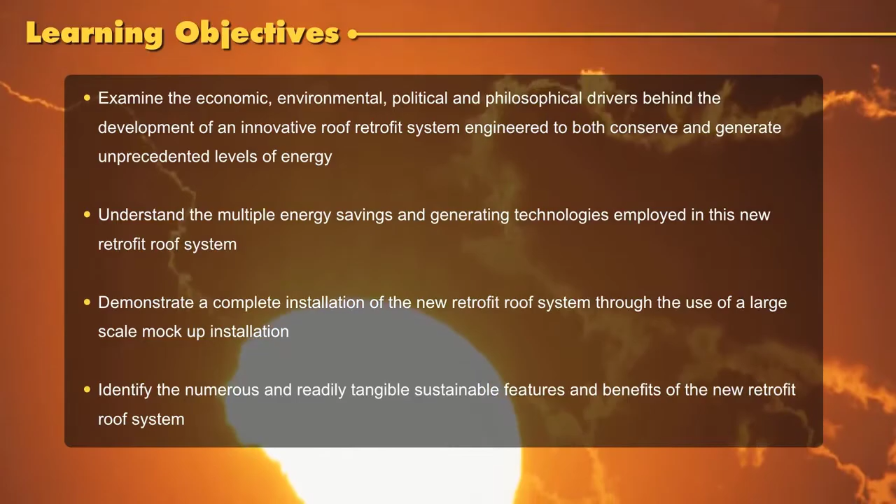In 2010, the Department of Defense, through their Environmental Security Technology Certification Program, ESTCP, awarded a grant to demonstrate a novel integrated energy-efficient metal roof retrofit system using commercially available products or systems.

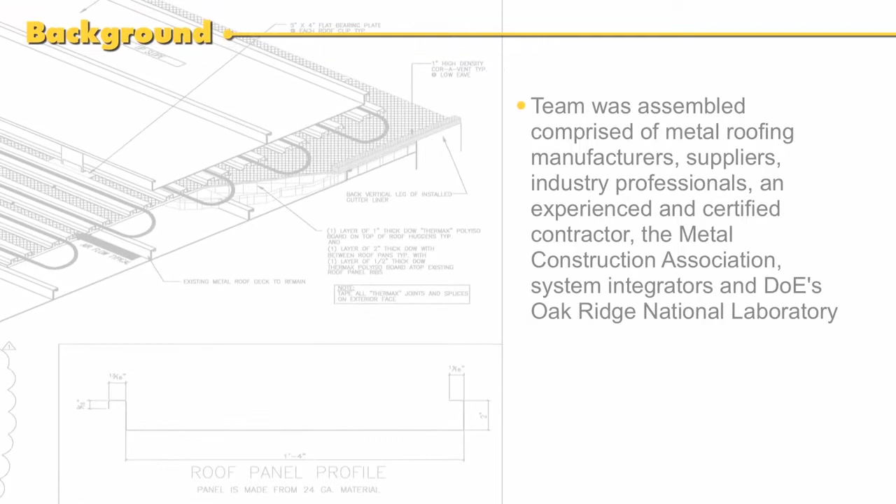A team comprised of metal roofing manufacturers, suppliers, industry professionals, an experienced certified contractor, MCA, the Metal Construction Association, system integrators, and the Department of Energy's Oak Ridge National Laboratory designed the integration of several technologies into a compatible roof retrofit system.

After conducting a structural engineering assessment of the integrity of the existing roof structure and its load-carrying capability, the retrofit system was then installed on the 11,900 square foot roof of the Security Forces Building at the Goodfellow Air Force Base in San Angelo, Texas. The total weight of the retrofit system is 4.5 pounds per square foot. Installation was completed in June 2012, at which time the collection of data on the building's performance began.

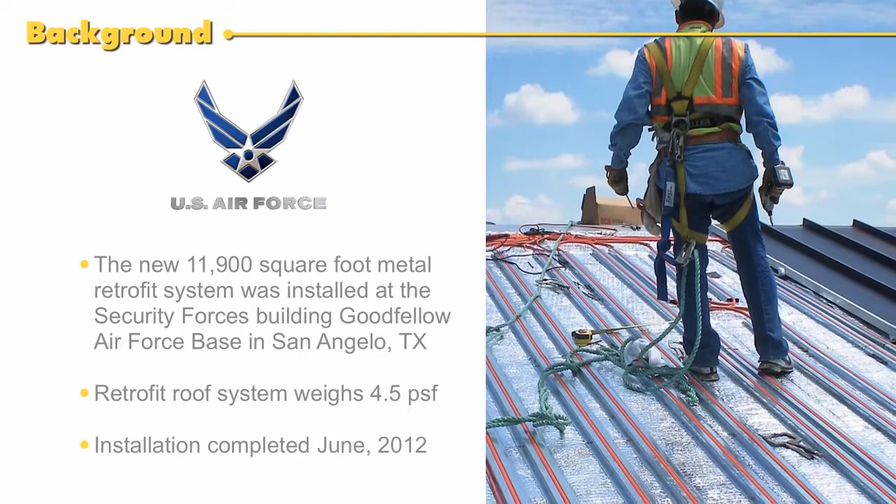The retrofit system used at the Goodfellow Air Force Base includes integrated photovoltaics, an integrated solar thermal water air heating system, cool roofing, enhanced insulation, a radiant barrier, natural convective cooling, and a rainwater harvesting system. The Goodfellow installation project is expected to yield over 750,000 kBTU of energy per year from the energy that's saved through energy efficiency improvements to the building or harvested from solar energy generated on the roof.

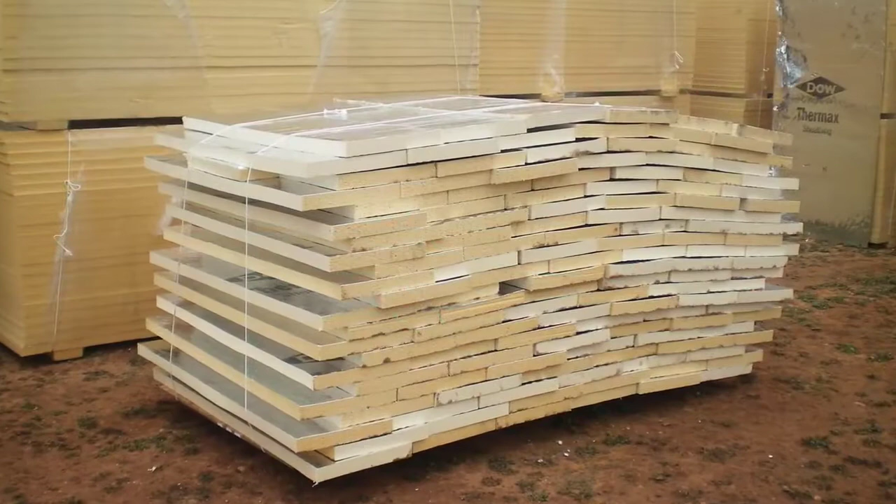This video webinar will show how the existing metal roof on that building was retrofitted, and in the process, will show how the new integrated roof system increases the energy efficiency of the building by increasing the R value of the roof, improving the building's air barrier, and offsetting conventional sources of energy through the use of photovoltaics and solar thermal technologies.

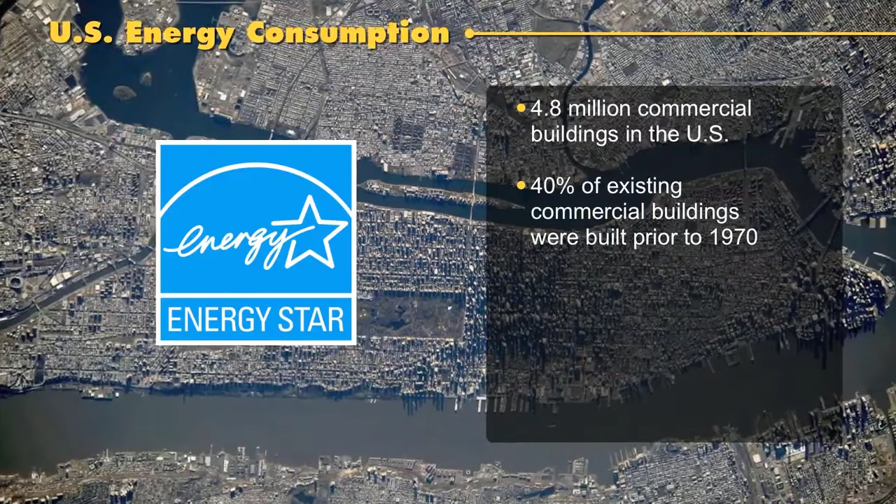The Energy Star program estimates that there are over 4.8 million existing commercial buildings in the United States, with 40% of them being built prior to 1970. This was at a time when energy efficiency was not the priority that it is today. As a result, we have a large inventory of buildings that are poorly insulated and are using inefficient systems and building materials. Efforts are now underway to retrofit existing buildings to make them more energy efficient.

The DoD is the world's largest consumer of energy and operates over 2.4 billion square feet of building space. Several mandates and executive orders have required the DoD to produce or procure more of their energy from renewable energy sources. Their ESTCP program is used to demonstrate technologies and building systems that can help them meet the mandates and other requirements.

Today, the architectural community is significantly challenged to design all types of buildings that are more energy and water efficient, using renewable or alternative energy sources, and incorporating more retrofit concepts. The good news is that the work has already begun on the use of new building technologies and systems to implement energy-efficient solutions. A set of plans and a master specification for the installation are available upon request.

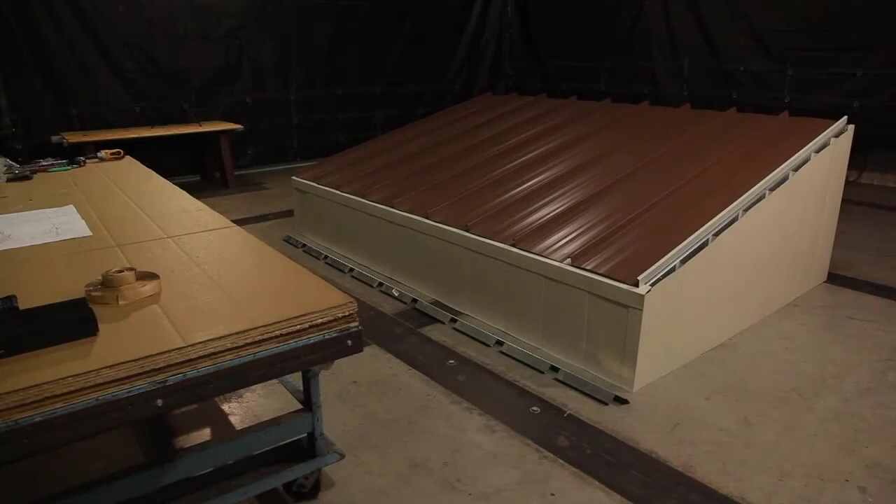Using a full-size mock-up in a laboratory, we will display the sequence used to install the materials and systems on the GAFB building. Here we see a reduced scale of a typical steep-slope pre-painted standing seam metal roof. This represents an existing roof on a building. The mock-up roof assembly depicted in this video is shown for illustrative and training purposes only. Each system design will vary based on the actual conditions found on any given project.

All systems must be designed in accordance with current best practices and be built by certified and experienced installers in accordance with the design and the component manufacturer's requirements. Imagine a 25-year-old standing seam metal roof with no cool roof finish and a roof assembly with R19 insulation. That building needs to be brought into the 21st century. Our first new component to add is a sub-purlin system.

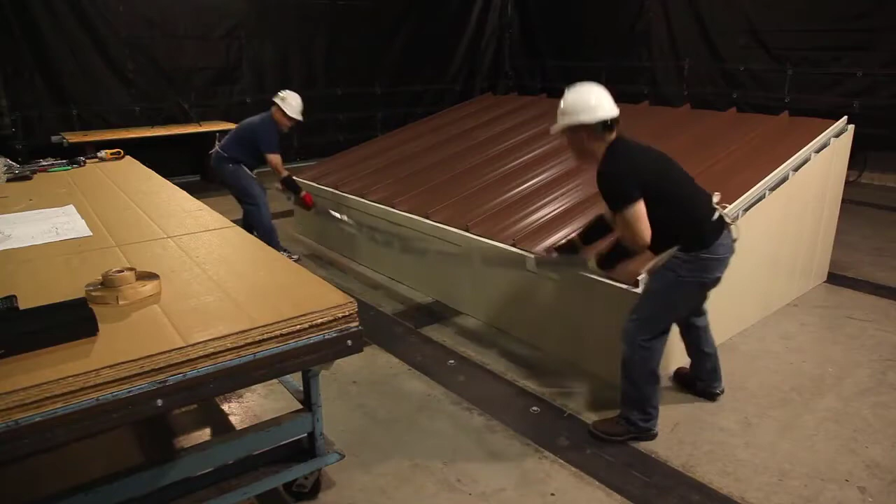The sub-purlins have undergone AISI S908 base test method analysis, showing that they typically strengthen the existing purlins beyond the loads added by the retrofit system. Additionally, they have been subjected to rigorous ASTM E1592 uplift testing to confirm their ability to resist wind pressures on

the new roof panels. The design of sub-purlins must take into account a number of factors, beginning with verifying the type and shape of the existing roof panels and the existing purlin spacing. Once established, the engineering component comes into play by determining the design uplift capacity needed by roof zone and then comparing this to the capacity of the new panel system that will be fastened to the sub-purlins.

The final fully engineered design focuses on how the new roof, when attached to the sub-purlins, will be strengthened and perform better at corners and edges, where most roofing failures occur. When necessary, the spacing between sub-purlins can be reduced by adding structural elements, which will in turn increase the capacity of the new roof. These wind uplift and other structural requirements will meet or exceed local codes, plus any additional

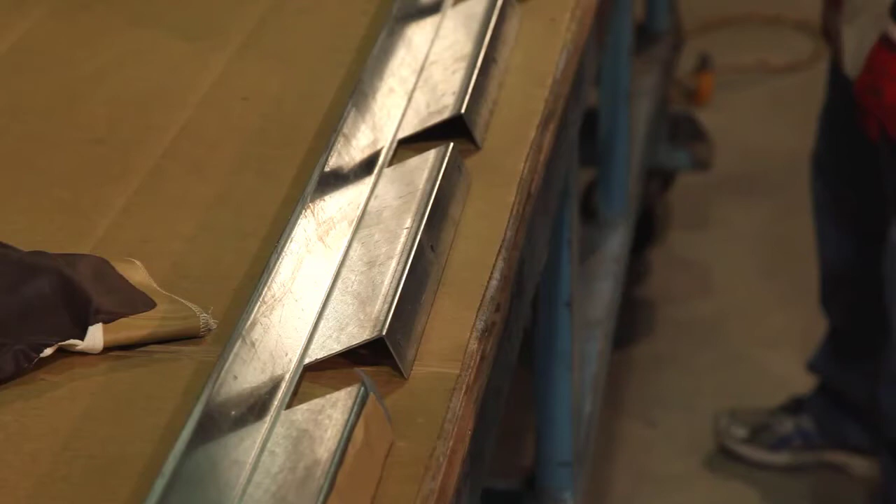project requirements. The 2.5-inch high sub-purlin system shown in this mock-up is identical to that used in the ESTCP demonstration project at Goodfellow Air Force Base. The sub-purlins are made of 16-gauge G90 galvanized 50 KSI high-strength steel, pre-punched to fit the existing 16-inch on-center roof

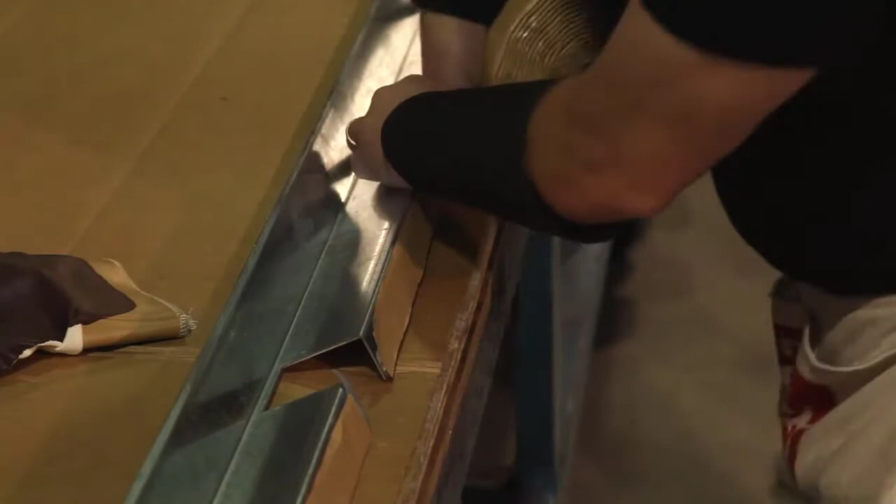panels. The first step is to attach a butyl tape to the bottom of the sub-purlin to create a watertight seal with the top side of the existing roof. This will prevent any leaks prior to the new roof being installed. The sub-purlins are designed to nest over the standing seam metal roof profiles. Then the sub-purlins are attached into the structural purlin or joists beneath the deck of the existing roof.

The sub-purlins for this building are attached with 1/4-inch diameter self-drilling fasteners every 16 inches using a standard magnetic driver and torque-limiting screw gun. Fasteners are normally installed from left to right along the length of the part. Sub-purlins are designed to withstand additional dead loads for solar technologies that are part of the retrofit roof system. Once attached, a new platform is formed on which additional components of this retrofit roof system will be secured.

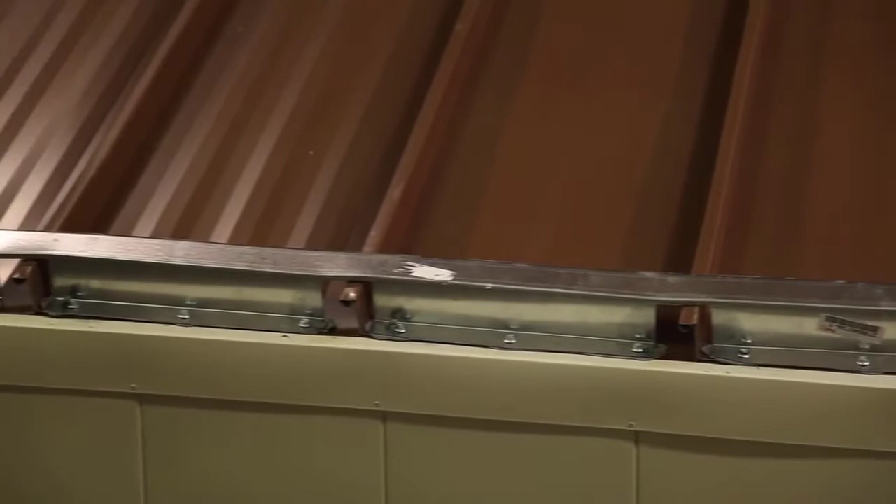The installation by a qualified and experienced certified contractor of a sub-purlin system has to be as intuitive and simple as possible, using standard tools and fasteners, which was the case on the Goodfellow Air Force Base project.

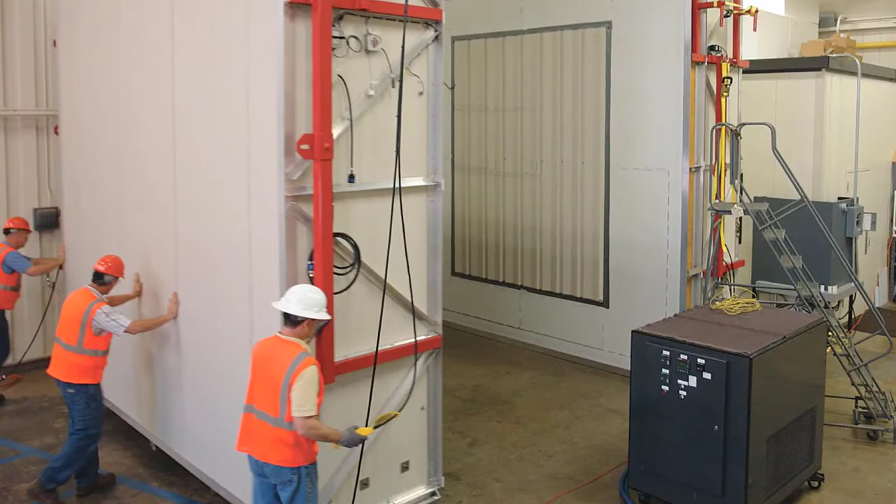Metal is a conductor of heat. As a result, installing continuous insulation with a high R value is a critical component, helping to minimize the effect of thermal shorts. Recent research at Oak Ridge National Laboratory was focused on the thermal performance of new and innovative

insulated metal roof assemblies. Using the ASTM C1363, or hotbox test, this work provided an indication of the relative efficiency of the insulation and provides guidance to designers on what assemblies more closely match the calculated value of the insulation used in the design. A key result of this research showed that it is important to recognize how insulation systems are constructed, rather than looking only at the total R values of the insulation layers.

On our mock-up, with the sub-purlins properly installed perpendicular to the standing seams of the metal roof, a grid work of the sub-purlins to support the standing seam roof is formed on the roof. Using that grid work, we then installed polyisocyanurate rigid foam insulation board.

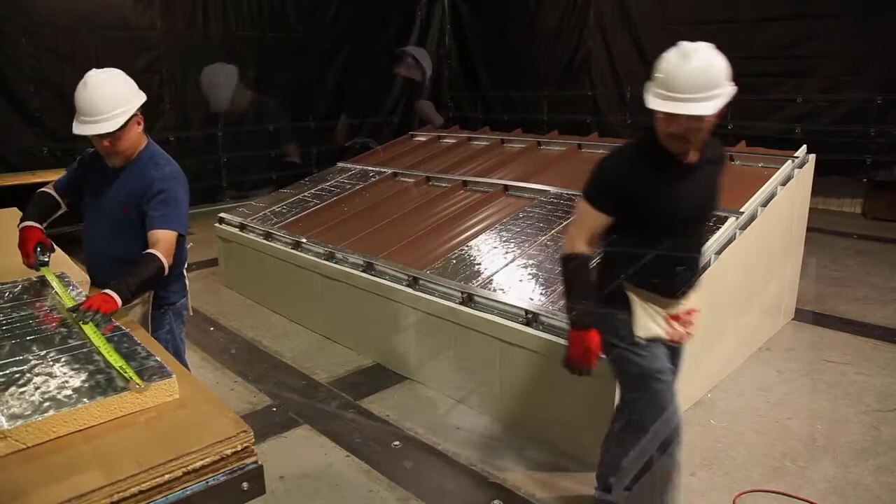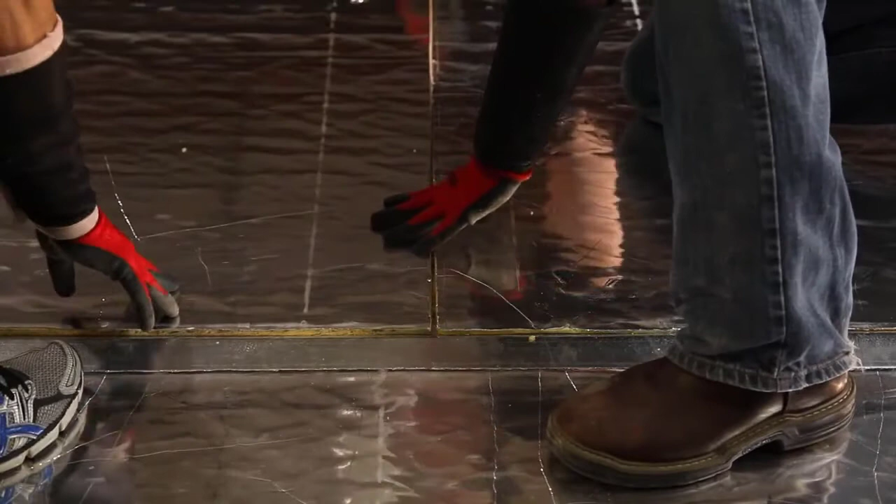Once that material is installed, an additional 1 inch thick polyiso rigid foam insulation board is installed to bring the total to 2.5 inches, which complies with the ASHRAE 90.1 2010 standard for the climate zone, which is ASHRAE CZ3 of San Angelo, Texas. In this mock-up, the workers are walking on the product. However, on a real job site, walking on the rigid board is not recommended.

Then reflective foil-faced sheets of 1-inch thick polyiso rigid foam insulation are installed and secured with insulation fasteners. The seams of all insulation boards are staggered to eliminate thermal shorts, and the seams on the 1-inch outer layer of insulation boards are taped to eliminate air leakage and minimize heat gain.

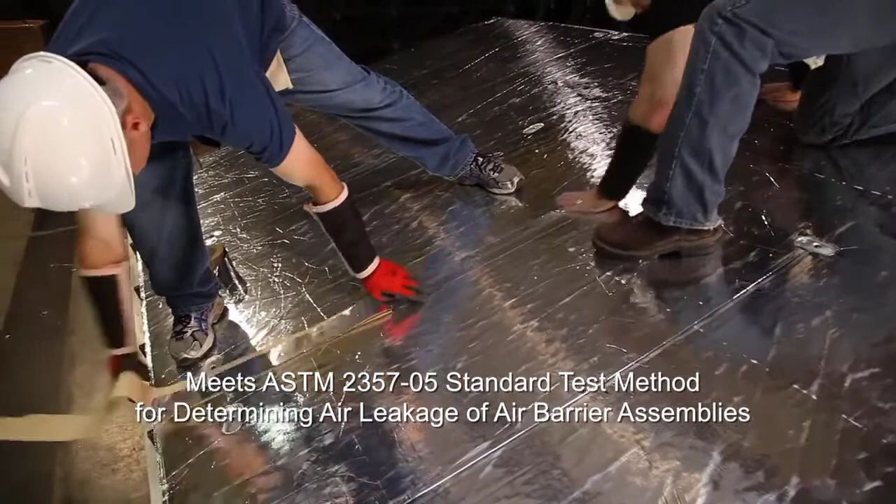The hot box tests confirmed that using a layer of continuous insulation, CI, added more to the overall effective R value than just using fiberglass batts. When used in conjunction with the appropriate joint closure system, polyisocyanurate insulation effectively blocks airflow, meeting ASTM E2357-05 standard test method for determining air leakage of air barrier assemblies and ASHRAE 90.1 2010 requirements.

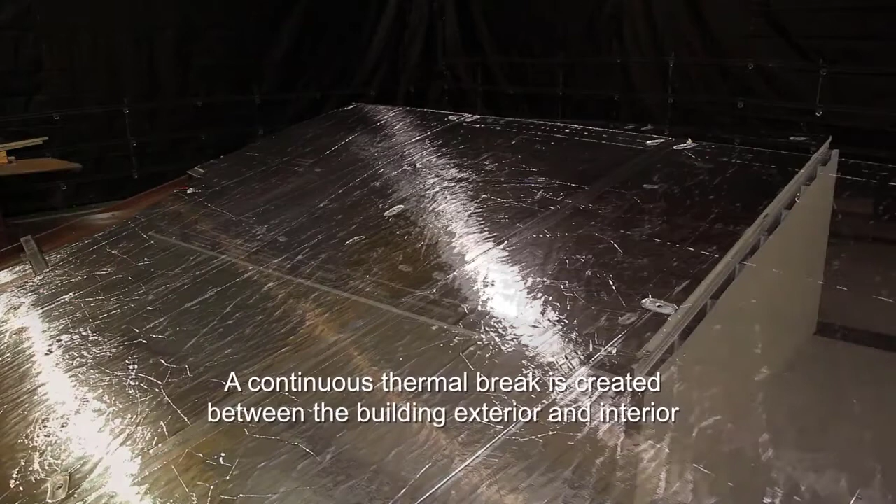And the low perm rating helps to reduce moisture condensation within and below the insulation. Also, the insulation, especially if it's taped, can provide a second layer of defense against any leaks in small gaps or holes from wind-driven rain. Note that the second layer of insulation covers the top of the structural sub-purlin, creating a full thermal break between the building exterior and interior.

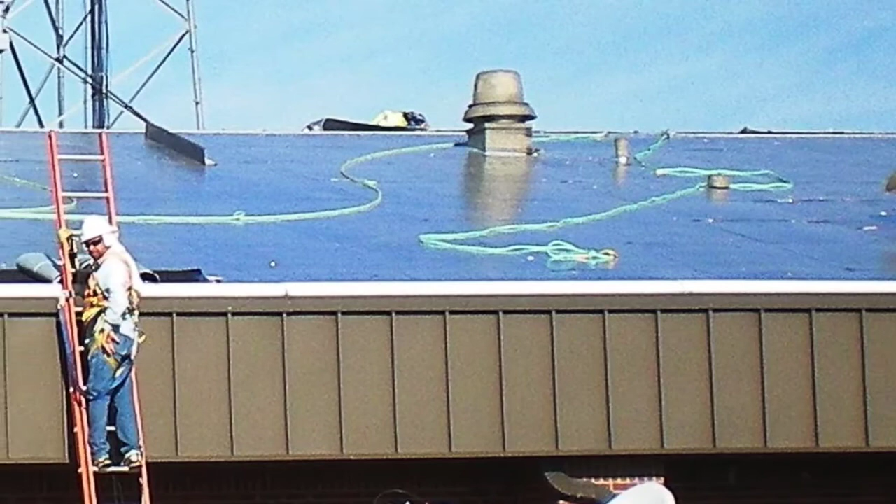Contractors and installers can appreciate the ease of construction, as they did on the Goodfellow Air Force Base project, when rigid insulation is specified as part of a retrofit because lightweight insulation boards can be sawn or cut with a knife and then quickly installed on the structure.

On the Goodfellow Air Force Base installation, this level of insulation from the retrofit, combined with some of the other components that are installed, and the existing draped batt glass fiber insulation on the existing roof system, brought the total insulation level up to R51 for the system.

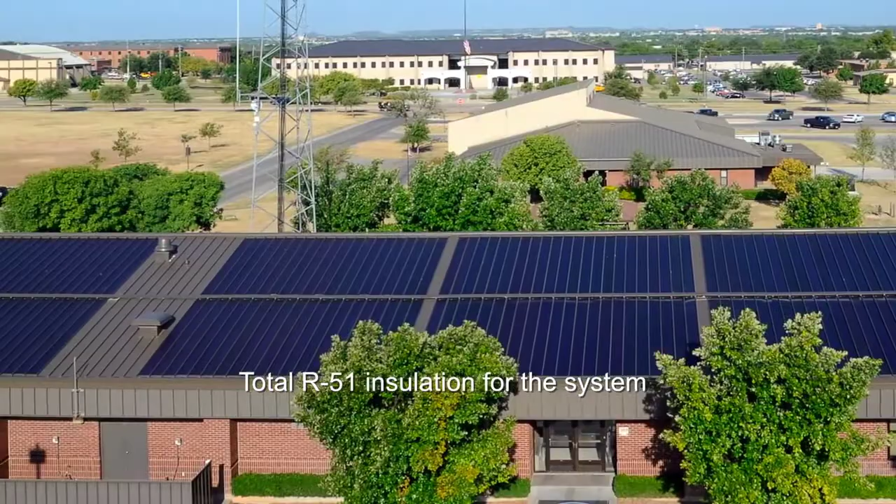The U.S. Green Building Council and the U.S. Environmental Protection Agency estimate buildings account for 40% of our nation's primary energy usage, and almost 75% of all electricity consumption. According to the U.S. Department of Energy's Oak Ridge National Laboratory, in an average low-rise building, heating and cooling energy accounts for about 30% of total energy used. About half of heating and cooling energy is attributed to heat loss in cooler weather or heat gain in warmer weather at the roof.

U.S. codes and standards are recognizing this and have become significantly more stringent in their insulation requirements. The U.S. military also has recognized the importance of increasing its buildings' energy efficiency. Reduction of greenhouse gas emissions related to cooling and heating loads is now a priority for all federal agencies, thanks in part to Executive Order 13514, Federal Leadership in Environmental, Energy, and Economic Performance, which was signed October 5, 2009.

The R value of insulation is the resistance to heat flow. The thermal resistance depends on the type of material, thickness of the insulation, and density of the insulating material. Depending on the type of materials used and manufacturing method, R values can range from around R3 per inch to close to R7 per inch of board thickness.

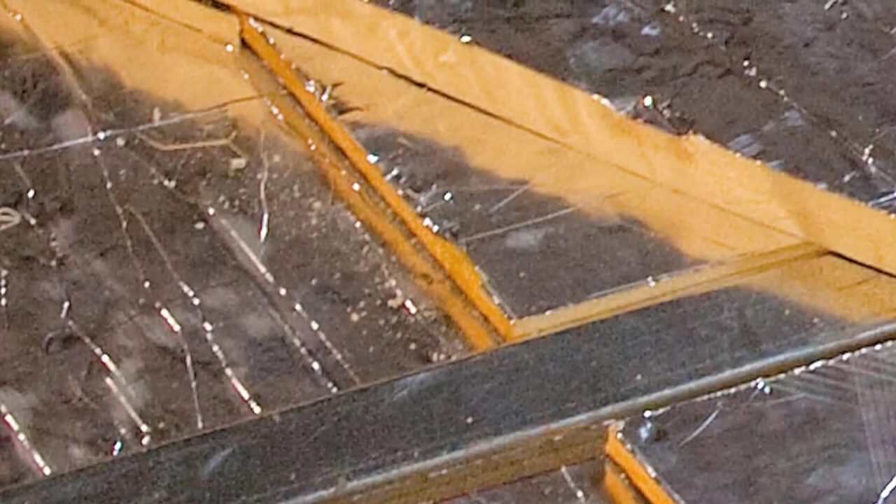In the case of the Goodfellow Air Force Base demonstration project, the rigid insulation board has radiant barrier quality facers on both sides, acting as a radiant barrier to further improve energy efficiency. The glass fiber reinforced polyisocyanurate foam core, R6.5 at 1 inch, is laminated between smooth facers and was seamlessly integrated into the final assembly. The projected energy savings at the Goodfellow Air Force Base from the insulation alone is estimated to be $2,500 per 10,000 square foot of building, or more than 20% of current utility expenditures.

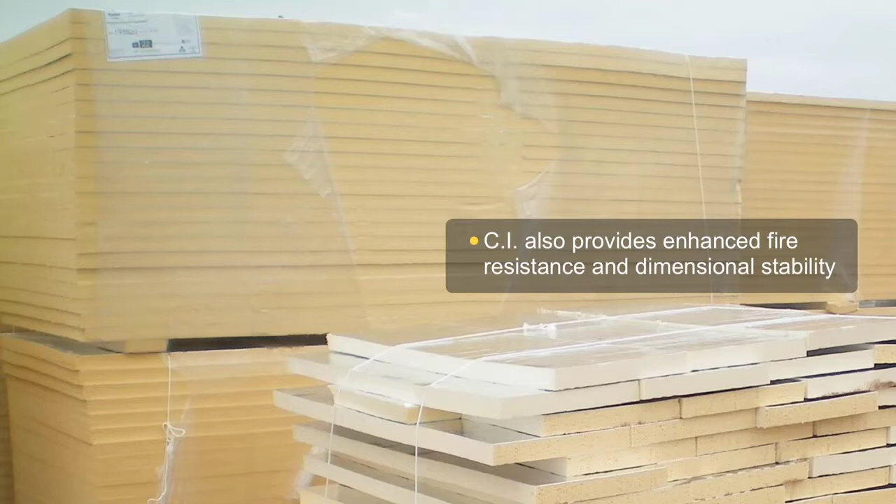In addition, the reinforcing material used in rigid board insulation, along with the patented chemical formula, enhances the fire resistance and dimensional stability of the insulation. These were important product attributes for the DoD demonstration project because of the high temperatures possible from the performance of the solar energy collection systems.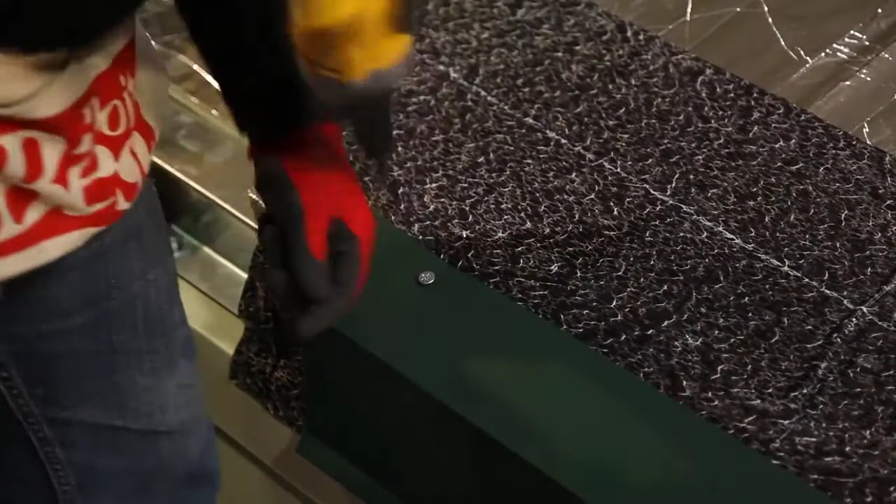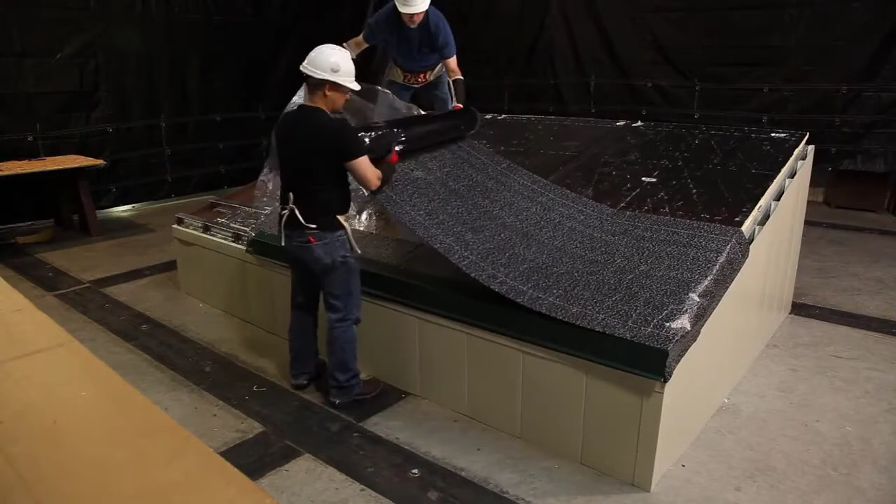With the added insulation secured and in place, the client wanted an optional secondary backup layer of water intrusion protection. So, a self-adhered membrane was installed on the surface, with excess material extending over the drip edge flashing. The self-adhered membrane is attached to the entire roof surface and sealed below the ridge, rake, and eave trim to complete the air barrier.

After the underlayment is secured, a radiant barrier is attached to the roof. The radiant barrier is another energy-saving component of the integrated system. Radiant barriers have been shown by DOE to reduce heat gain and loss in a roof system by 9%. In the Goodfellow Air Force Base installation, the radiant barrier serves an additional role in containing energy in the form of heat in the plane of the barrier, on which an integrated and concealed solar water heating system will be installed. The synergy between the efficiency of the solar thermal systems and the radiant barrier is a benefit in the design of the retrofit system.

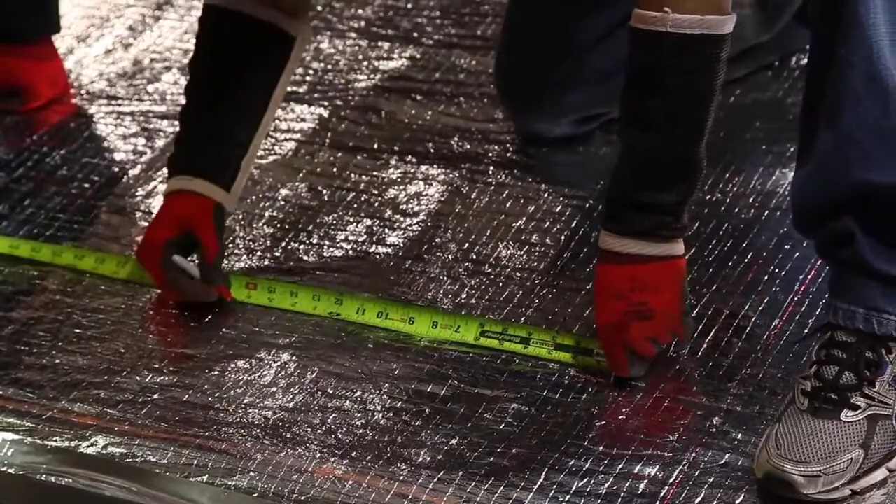For any type of building, water heating and space heating represents a significant percentage of the building's energy consumption. Thoughtful selection and implementation of a renewable energy system before and during construction can often yield high savings and beautiful aesthetics provided through an experienced and competent certified contractor, as demonstrated on the Goodfellow Air Force Base.

The combined building envelope plus energy technology systems fall into a category defined by the U.S. Department of Energy as Building Integrated Solar Technologies, or BIST systems. These systems collect the sun's energy as heat and transfer that energy to the building's space and water heating systems via heat exchangers using environmentally friendly heat transfer fluids. Being completely concealed by a roof surface, these systems are architecturally integrated into the building design and are hidden from view while remaining highly effective as a power source.

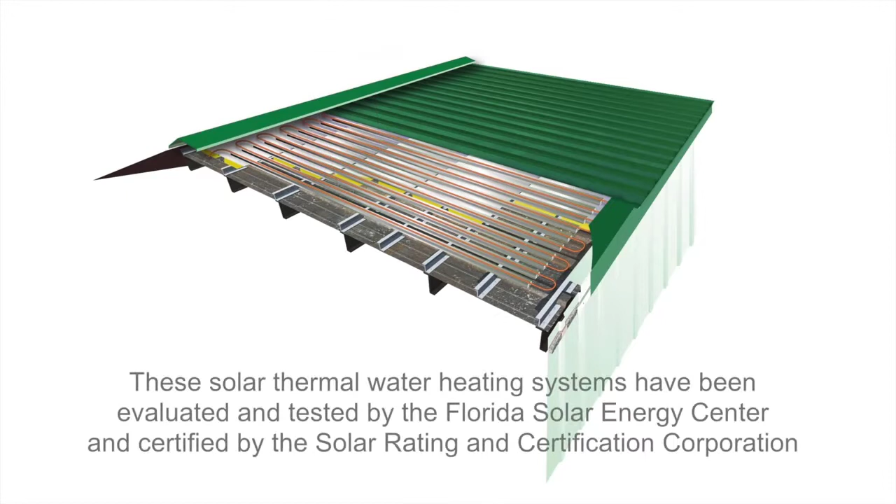These types of solar thermal water heating systems have been rigorously evaluated and have been independently tested by the Florida Solar Energy Center, Cocoa, Florida, and certified by the Solar Rating and Certification Corp in Cocoa, Florida.

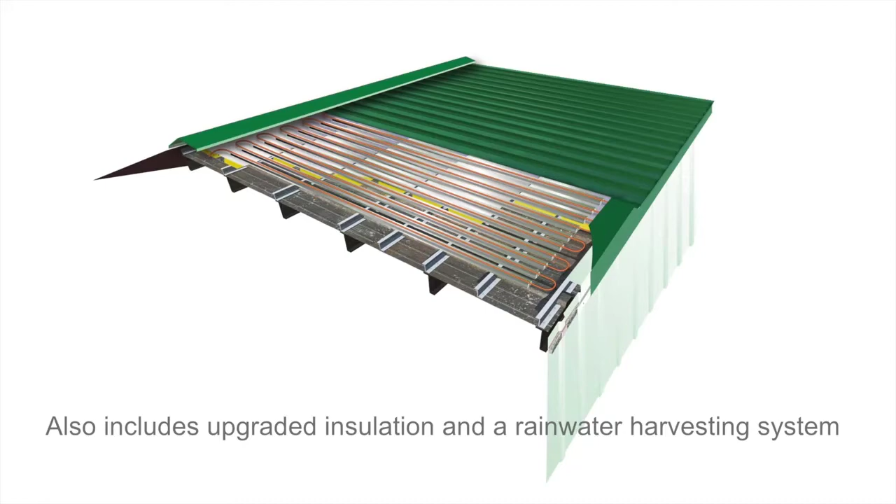The retrofit roofing project includes a new metal roof with integrated solar photovoltaic panels that are cooled by the building integrated solar thermal system and convective airflow along the bottom of the panels, increasing PV electricity output while producing hot water. In addition, upgraded roof insulation and a system to collect and reuse rainfall were part of the Goodfellow Air Force Base installation. A concealed solar thermal system is one of several integrated systems being demonstrated.

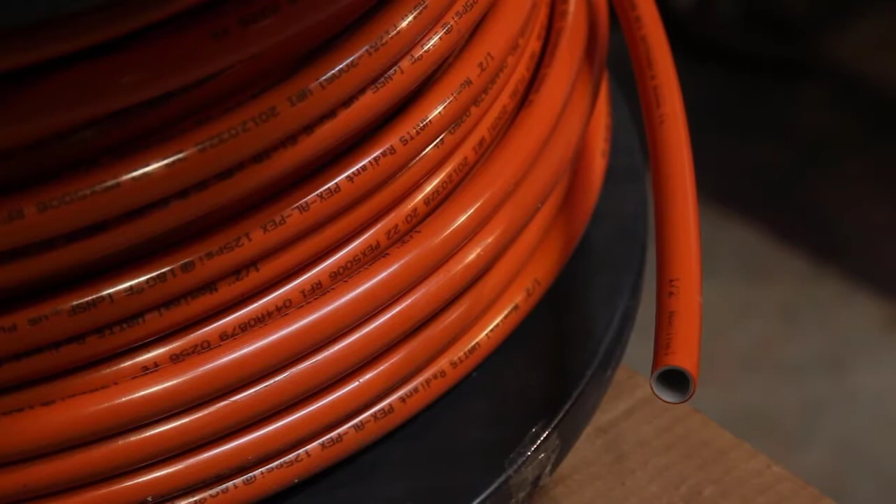The first step is the installation of Galvalume steel thermal purlins that are secured to the deck with screws driven through the flanges on the purlins. The channel in the thermal purlins is designed to hold an aluminum-lined PEX tubing that contains the heat exchange medium, which is used for water heating or space heating.

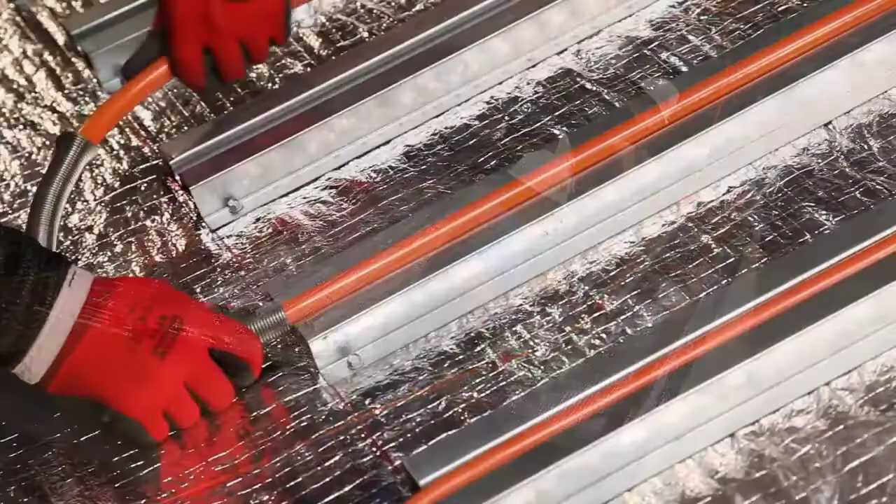Using a special tubing bender, the tubing is fed into the channels in the thermal purlins and tamped into place with a rubber mallet. The bending of the tubing is done with the tubing bender to keep the tubing from being kinked when formed into a given radius. A series of runs with this tubing can be isolated and controlled independently with manifolds.

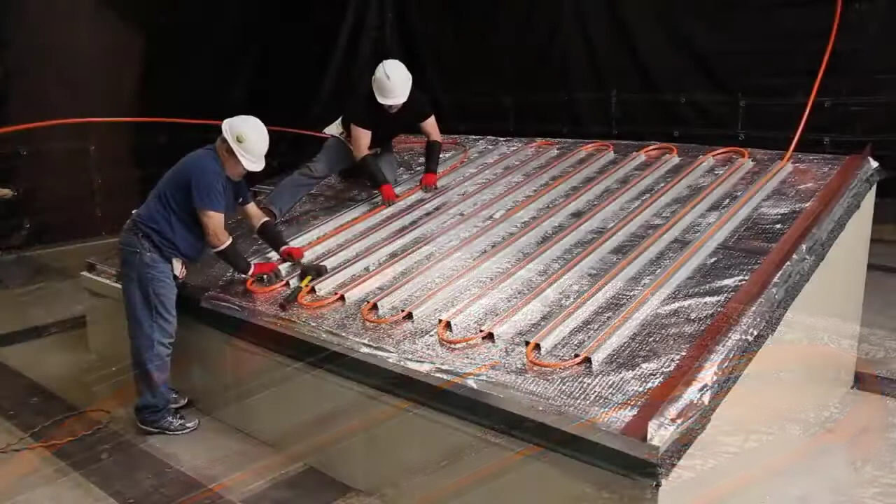The heat that's transferred through the outer roof is collected by the solar thermal system, located between the old roof and the new roof surfaces. As the heat is absorbed into the water glycol heat exchange fluid in the solar thermal system, it reduces the heat load that would otherwise flow into the building, directly reducing cooling costs by putting the thermal energy to work inside the building for space and water heating.

The heated water glycol liquid is used at Goodfellow Air Force Base for preheating domestic hot water and for space heat through an air heat exchanger. In addition, the synergy between the solar thermal system and the photovoltaic system on the new roof is such that the heat that is drawn away from the outer roof surface can help to lower the surface temperature of the PV material, which improves the efficiency of the PV system.

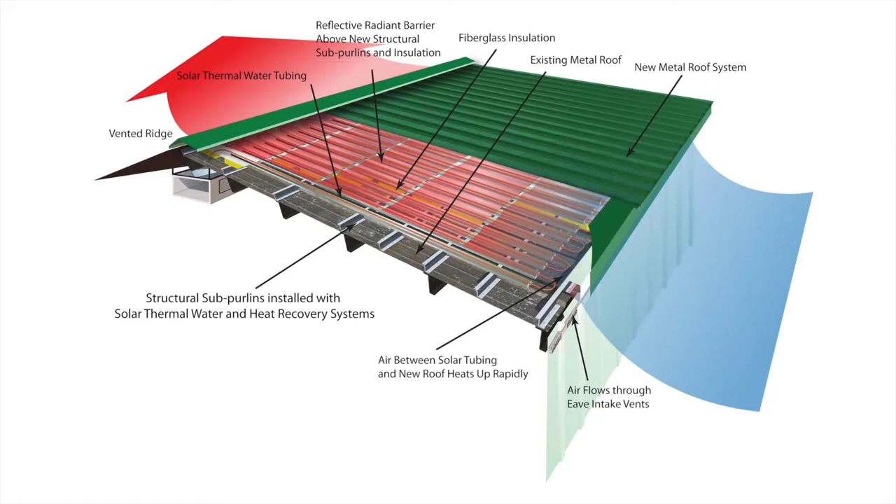An added benefit of the thermal purlins used in the solar thermal system is the air gap that is present around the purlins. This gap allows for natural convective cooling of air that is drawn in at the eave. An unobstructed flow of air can help to dissipate heat from within the roof assembly and lower the heat gain in warm climates. The airspace itself is also an insulating layer to minimize heat loss in cooler climate zones as well.

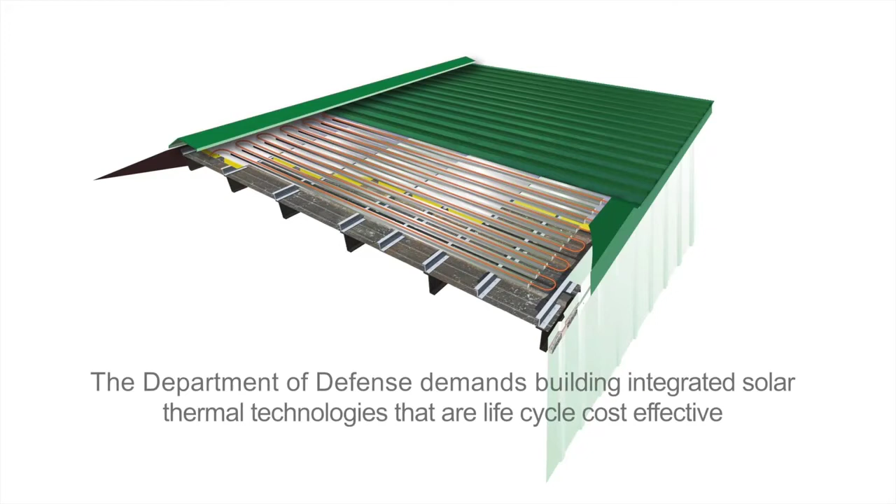Building integrated solar thermal technologies must prove to be life-cycle cost-effective as the DoD will demand. Instead of being a bulky add-on, the integrated roof assembly results in a hardened building envelope with a high probability of withstanding today's unpredictable weather patterns. There is a growing interest in renewable energy, such as solar, to reduce our dependence on foreign oil and lower the environmental impact of burning fossil fuels.

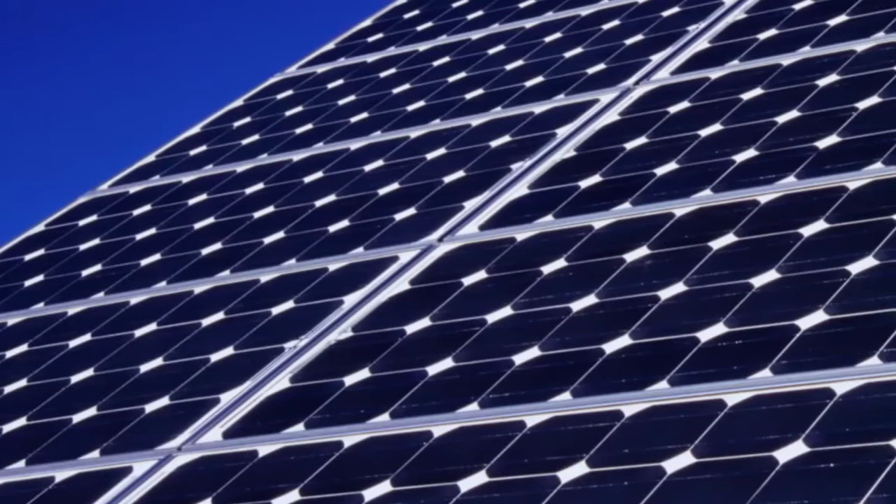Sunlight is by far the most abundant and renewable energy resource. The use of photovoltaic systems to harness the sun's energy continues to grow. One of the key factors that will contribute to the anticipated global growth of solar power is the progression of functional and technological advancements in the whole spectrum of photovoltaic products. The integration of photovoltaics with metal roofing systems, new and retrofit, is growing.

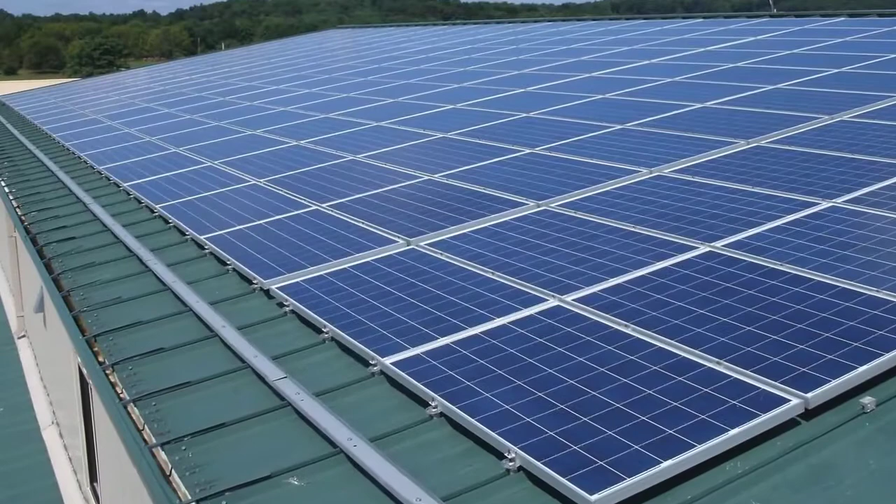Metal roofing is an excellent platform for thin film and crystalline modular mounted systems. Unlike conventional roof materials, the durability and long service life of metal roofing can outlast the useful life of a typical 25-year warranted PV system. It is common to see the PV system removed and replaced long before the end of a metal roof's service life. This creates significant savings over the life of the PV roof combined asset.

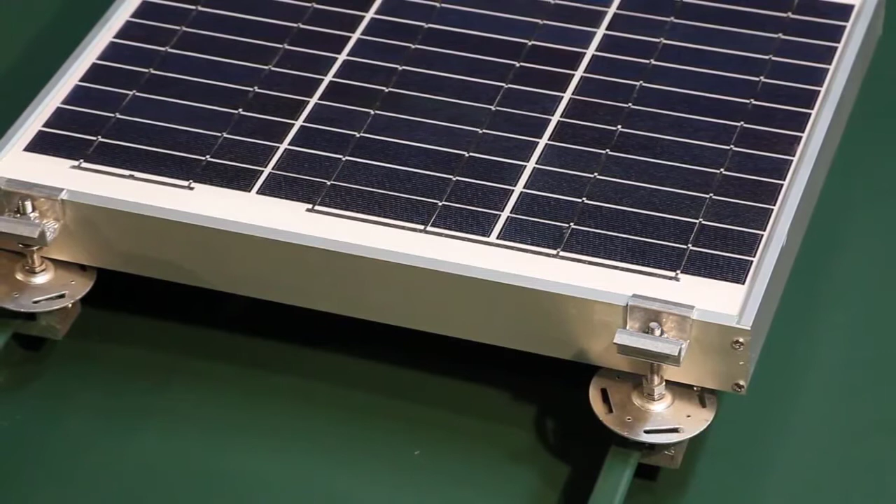An additional fact is that PV of either thin film or crystalline modular types can be mounted to metal roofing without penetrating the roof membrane, which eliminates potential sources of leaks and other maintenance issues. Steel roofing is strong, lightweight, non-combustible, resistant to hail, wind, and weather, and features almost unlimited aesthetics and design flexibility.

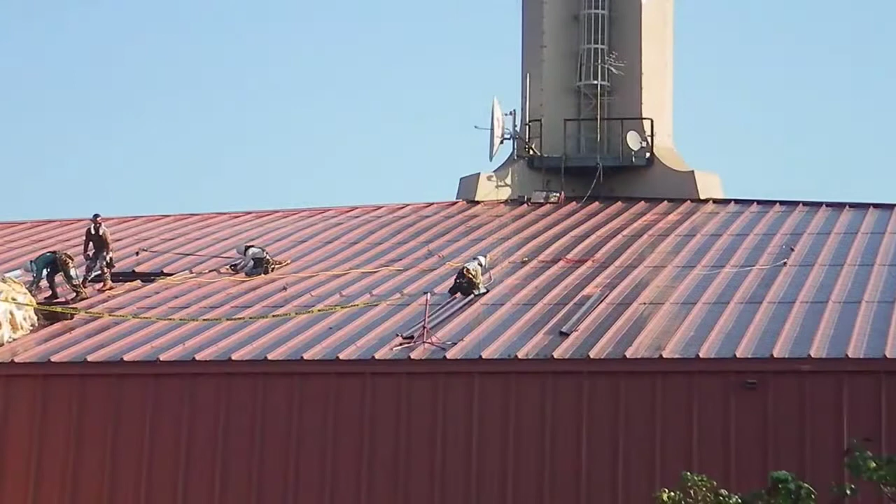For decades, our nation's military has used metal roofing for new construction, re-roofing, and retrofit projects. In fact, DoD's Base Structure Report estimates that more than 1.85 million square feet of metal roof retrofits have been installed on military and federal facilities in the U.S. It is further suggested that another 617 million square feet of single-story military buildings will receive metal roof retrofitting.

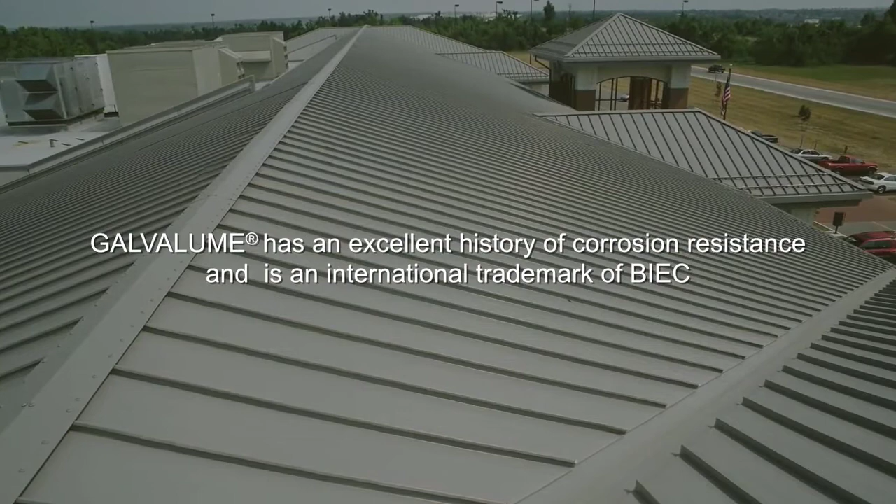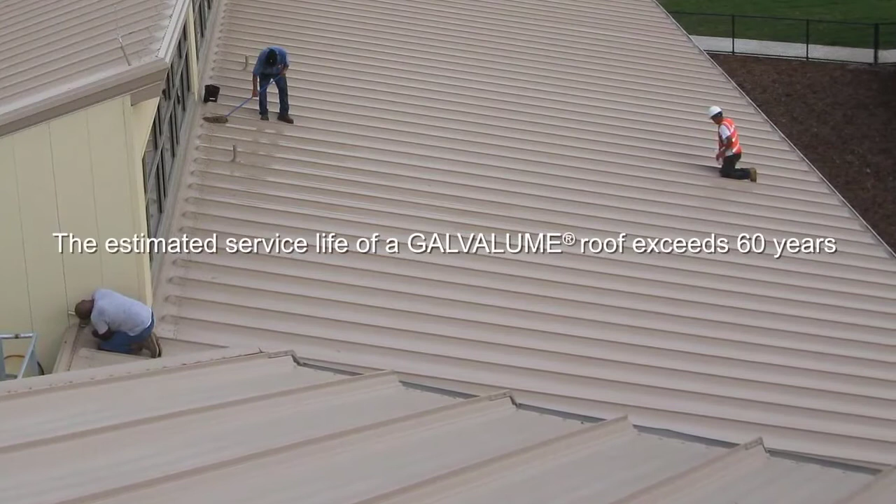The Goodfellow Air Force Base project involves an existing metal roof retrofitted with a new 24-gauge pre-painted Galvalume steel standing seam roof system. Galvalume is 55% aluminum zinc alloy coated sheet steel that has an excellent corrosion resistance. Galvalume is an internationally recognized trademark of BIEC International Inc. and some of its licensed producers. Inspections of Galvalume roof installations since its introduction to the marketplace in 1972 have suggested the estimated service life of this type of metal roof will exceed 60 years in most climates.

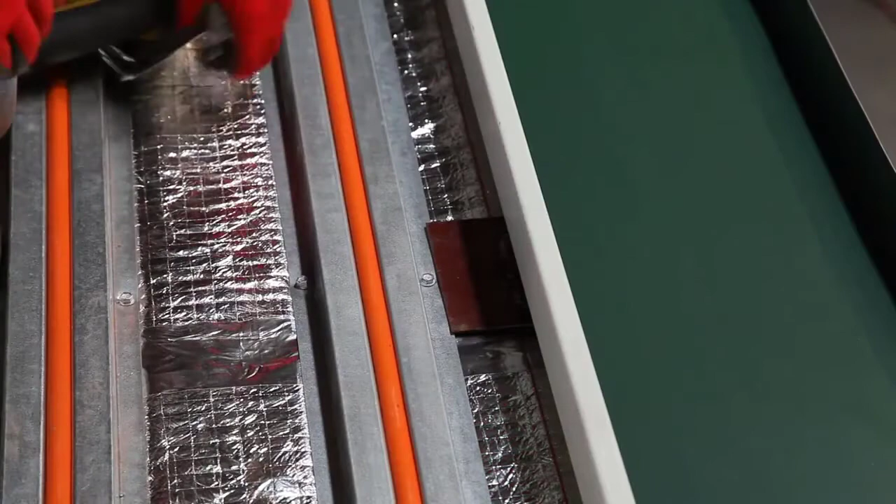Standing seam steel roofing is created with roof panels that are mechanically interlocked together to provide a watertight roof system. The attachment clips are concealed but mechanically attached to the substructure of the building framing, meeting all building code requirements for design loads and resistance to wind uplift. The concealed clips are designed to allow for thermal movement of the metal panels.

The installation of the factory roll-formed metal roof system, along with trim, curbs, flashing, and a final layer of insulation, took a crew of 5 men 12 days working in close coordination with other teams installing the building-integrated solar thermal system directly beneath the metal roof surface, along with the sensors embedded in the roof membrane for the Oak Ridge National Laboratory data acquisition system that is monitoring the performance of the building.

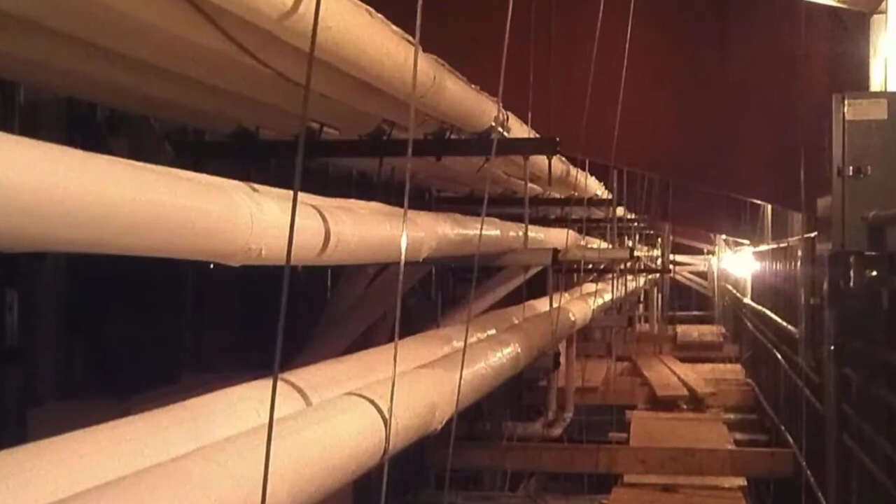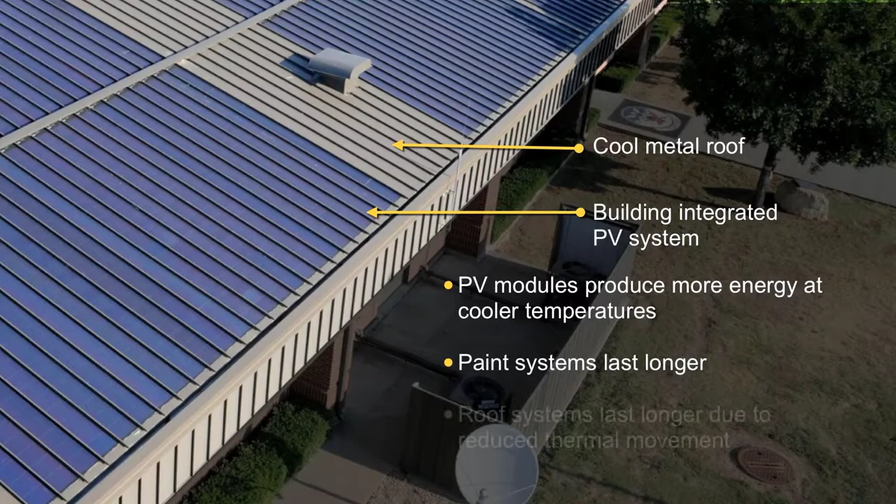Additionally, cool roofs work synergistically with the building-integrated solar photovoltaic system installed on the Air Force Base's roof by helping to cool the PV modules. PV modules operating at cooler temperatures produce more energy and last longer. Another advantage of using cool roofing is that the reduced surface temperature extends the life of the paint systems and also minimizes thermal movement, which prolongs the integrity of the roof system.

Cool metal roofing technologies are described in the government's Whole Building Design Guide, a document with a goal of creating successful high-performance buildings by applying an integrated design and team approach during the planning and programming phases. Because DoD and other government agencies follow the WBDG, cool roofing technologies are an important aspect of their buildings.

The Department of Defense is interested in solar power installations since it's operating with a federal mandate requiring the DoD to produce or procure 25% of all energy from renewable sources by 2025. That will require installations of many photovoltaic systems across the DoD portfolio of buildings and on federally owned land. More than half of the roofs on U.S. military bases are metal right now.

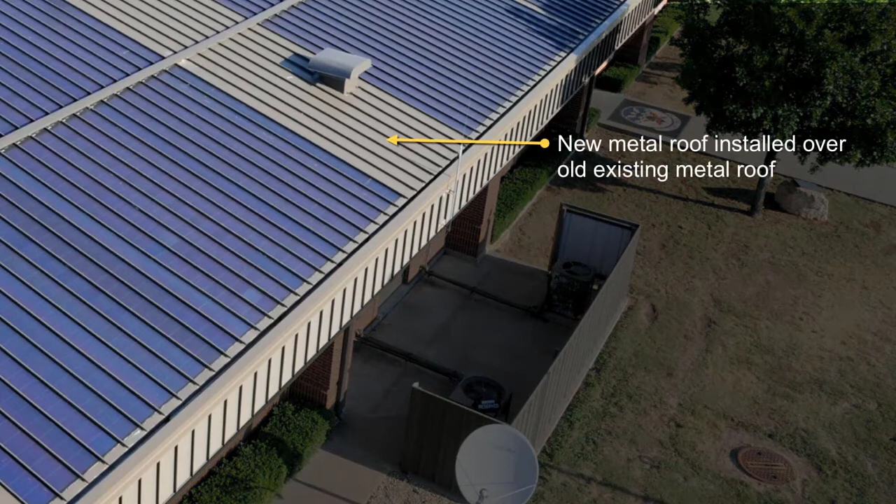The mandate was partially responsible for the DoD's ESTCP Core grant team selecting a retrofit metal roofing demonstration project that included a building-integrated photovoltaic system. The system, as installed at Goodfellow Air Force Base, features a metal roof retrofit system, metal over an existing metal roof, that includes a laminated thin-film amorphous silicon PV system.

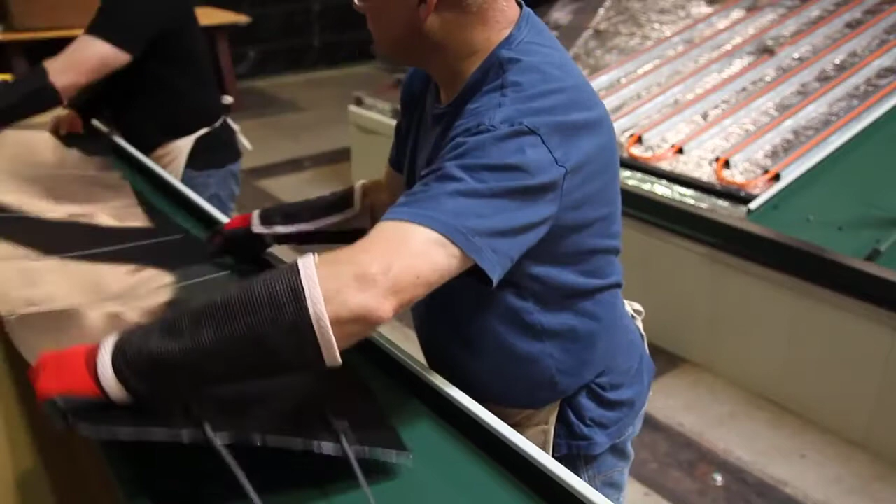To install this type of PV system, the thin film product is first laminated to the top of the metal roof panels using a self-adhered pressure-activated peel and stick adhesive. After cleaning the surface of the metal panel, the thin film is adhered by rolling it into place with a special J roller tool. The laminating is often done in the field, but can also be done in a factory, with panels then being shipped to the site. Once the PV is attached, the panels are ready to be installed directly over the integrated solar thermal water heating system.

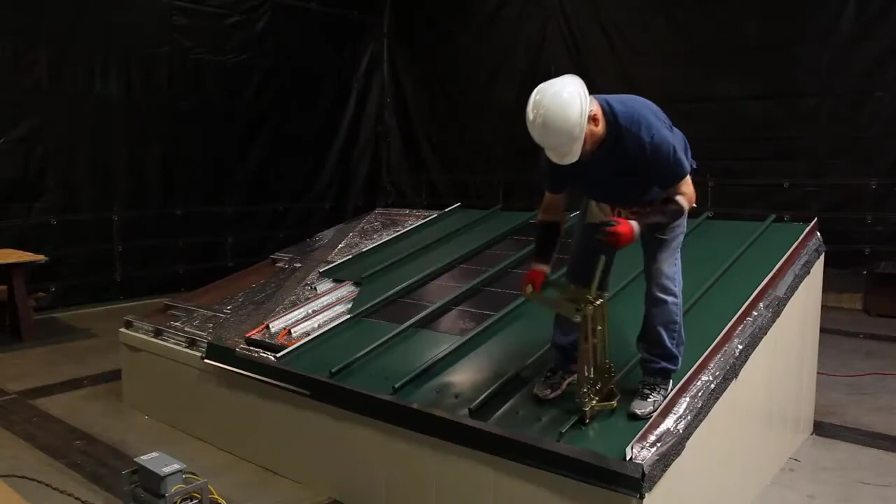After the metal panels are aligned and secured from movement, special concealed clips are attached to the seams of the panels and fastened through a bearing plate, through the insulation layers, and into the sub-purlins. The seams are then mechanically interlocked. The final result, after installing the new metal roof, affords an architecturally pleasing appearance with the design line and profile of the metal roof panels.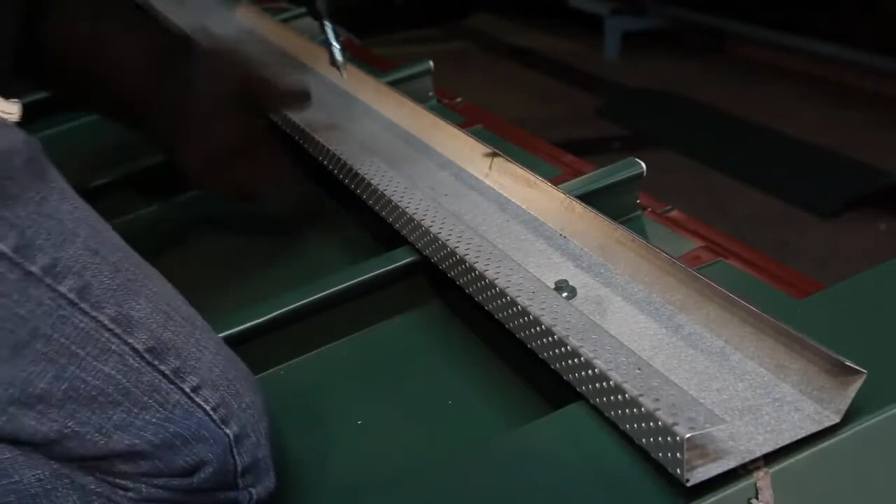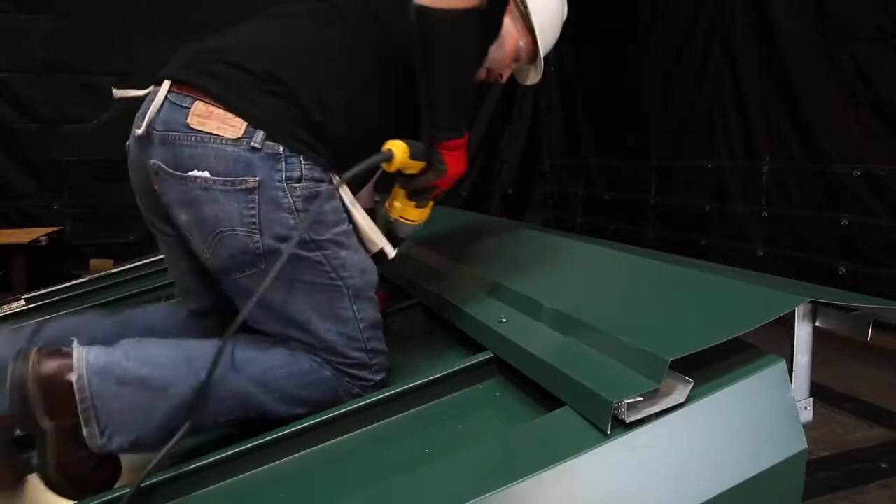All cabling from the PV modules is run through the ridge cap area to avoid penetrating the metal roof surface. The grid-tied balance of the system includes an inverter, array wiring, disconnects, and other components required by code and good practice. The laminated thin-film PV system was installed over an integrated solar thermal water heating system that is also integrated into the retrofit roofing assembly.

The ability to harvest solar energy in the form of heat from the metal roof was important to the success of the retrofit. The ability to utilize the heat buildup on the roof by transferring the energy to glycol-protected heat transfer fluids, which in turn deliver the energy to space and water heating systems, not only doubles the total solar energy harvest of the installation, but it also improves the efficiency of the PV system by cooling the PV panel surface.

This synergistic combination of thin-film PV with solar thermal technology as part of the roof is called Building Integrated PV Thermal, or BIPVT. The two technologies, installed during new or retrofit roofing projects, work together to harvest the maximum amount of solar energy to generate power and heat water.

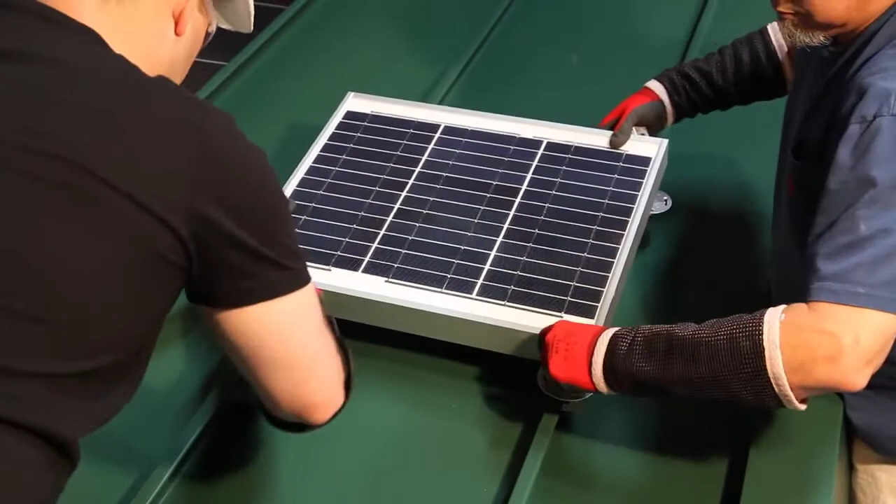It is important to note that crystalline PV systems, as well as thin film systems, can also be incorporated into a metal roof retrofit integrated system. Crystalline PV systems have higher sunlight to energy conversion rates than thin films. But both types of products are compatible with standing seam metal roofing, and both can be attached without penetrating the metal roof surface.

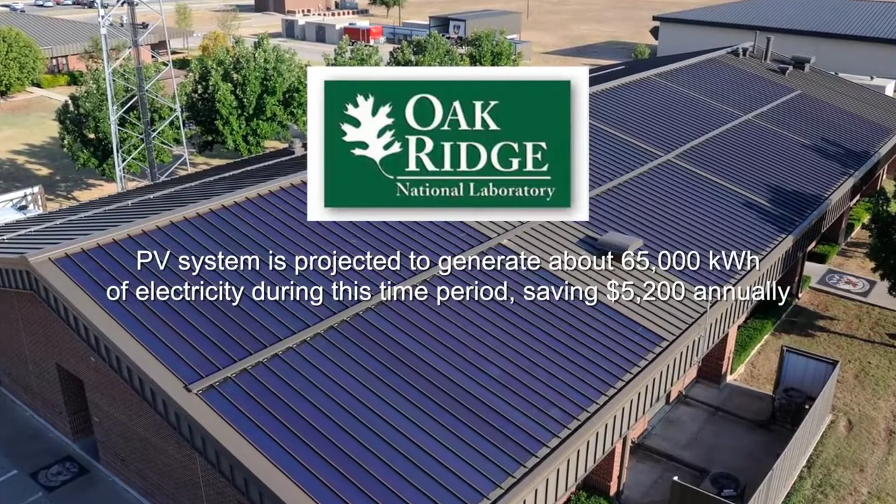The performance data from the demonstration building is being collected and authenticated by Oak Ridge National Laboratory over a one-year period. The data will be used to verify the predicted energy savings from the PV installation on the 11,900 square foot roof. The PV system is projected to generate about 65,000 kilowatt-hours of electricity and save the base approximately $5,200 annually in their electric bill for this building. Equally important to the base, it brings them closer to meeting the federal mandate on the use of renewable energy resources.

The Goodfellow Air Force Base photovoltaic system has been in place since June 2012 and is already producing enough electricity to offset 37% of the building's usage based on 2011 consumption levels. More importantly, 2011 was one of the hottest summers and highest usage in recent memory in the San Angelo, Texas region.

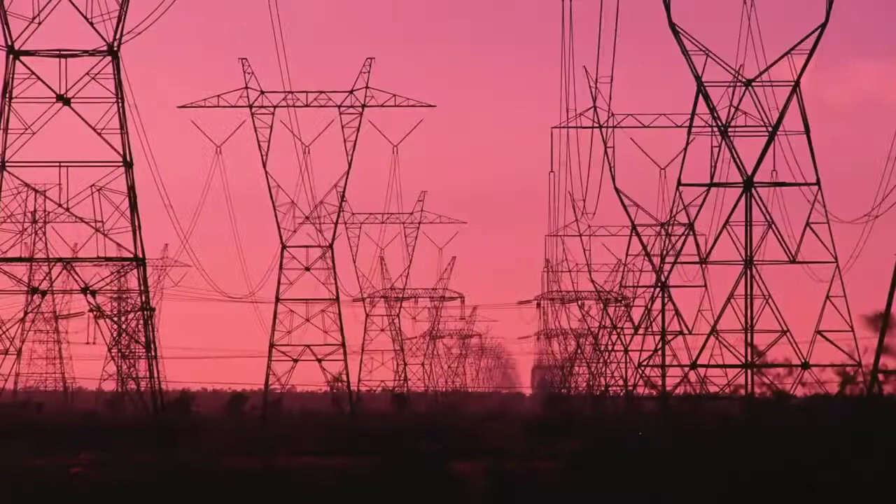Goodfellow Air Force Base has an electric grid of their own within the base, so any excess electricity not consumed by the demonstration project building will be fed into their internal grid and used downstream by the next base facility. Bearing in mind that the goal is to provide a minimum of 25% of energy needs away from the grid, this performance exceeds the stated DoD goal.

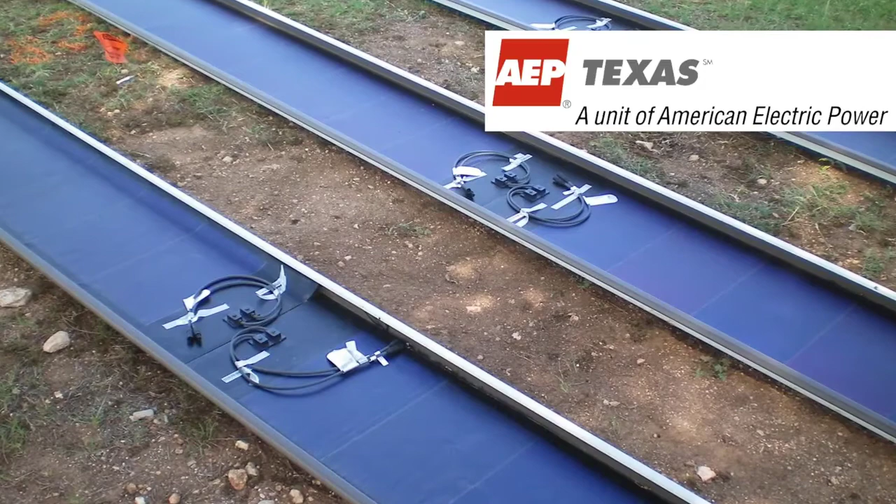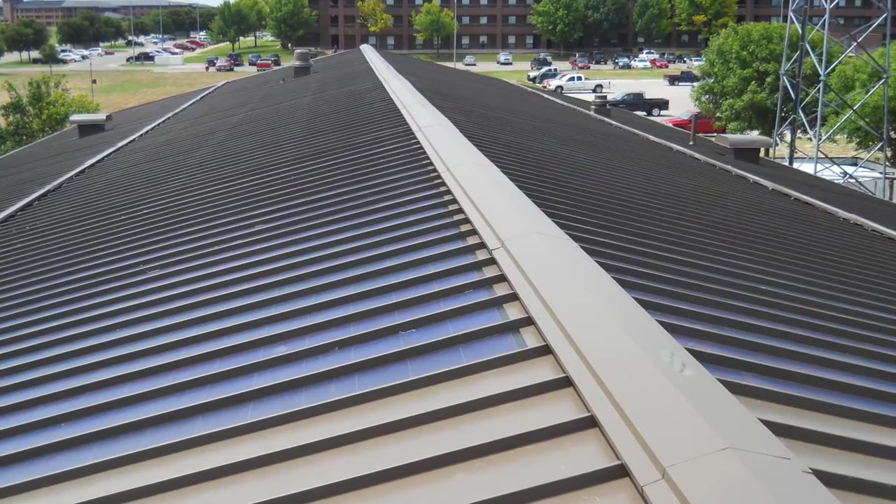As an added bonus, the AEP Texas North Company SMART program for energy efficiency improvement provided a one-time payment of $6,184 to Goodfellow Air Force Base for this improvement, with 96% of this payment credited to the PV system. To learn more about other government and utility incentives for energy efficiency and/or renewable energy improvements, visit the database of state incentives for renewables and efficiency, funded by the DOE, at www.dsireusa.org.

The base demonstration project is intended to verify the estimated kilowatt-hours of electricity that can be generated for cooling and heating operation of the building. In addition, the reduction in grid-required electricity will result in a significant reduction in CO2 emissions attributed to the building. The ESTCP project expects to generate data on energy and water reduction that can be used to model the performance of any building being retrofitted on any military base in order to meet their stated energy goals.

The success of the Goodfellow Air Force Base ESTCP project relied on having a competent, multifaceted, certified contractor capable of installing multiple unique technologies on the Security Forces building. It was critical the contractor combine the integrated technologies in proper succession for the systems to provide the expected performance. In addition, installation had to be accomplished within the timeline and in a manner compliant with the many rules and regulations of the military base.

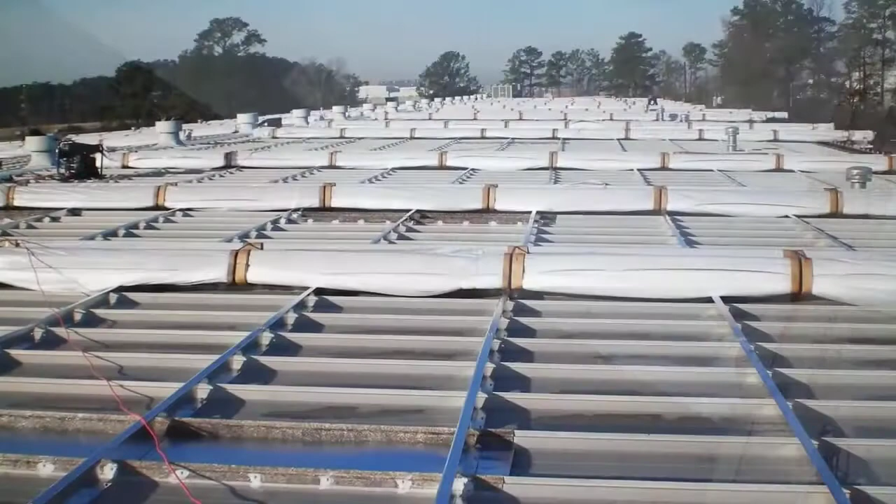Complexity of construction and keeping within the rules can be challenging, but was done flawlessly with construction management and planning by the contractor. A contractor's team must ensure the integrated technologies, subpurlins, insulation, solar thermal water and air heating, photovoltaics, and above-sheathing ventilation are coordinated appropriately into one holistic metal roof system.

One cannot overly emphasize the importance of a good contractor to perform what the architect envisions, to fulfill what the manufacturers state their products can do, and to attain what the client foresees as an end result. This is true in any project, including Goodfellow Air Force Base, in which the credibility of the integrated roof system is being analyzed by ORNL and may result in DoD adopting integrated metal roof retrofits throughout its facility portfolio.

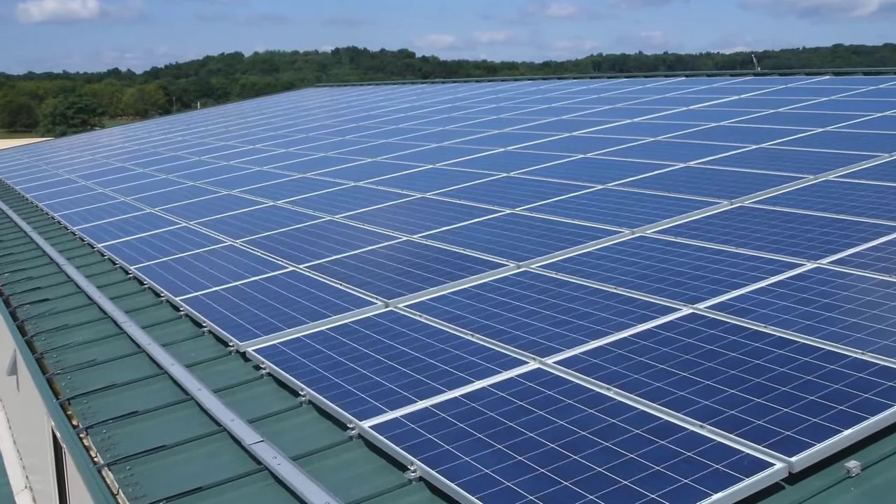A holistic, integrated retrofit roof system is appropriate for a variety of building types and occupancies in a variety of climate regions. Integrated building systems, when applied to the DoD infrastructure and/or the commercial building market, can dramatically contribute to reducing energy consumption by providing retrofit roofing, insulation, air barrier, and ventilation improvements along with renewable energy systems in a turnkey package.

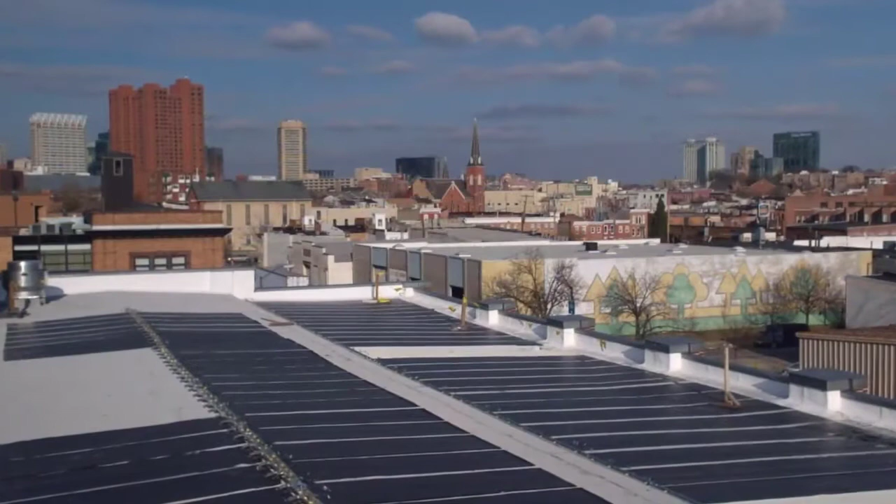In addition, a turnkey package ensures that all trades work interdependently under a single supplier that's responsible for delivering the high-performance building system, along with an integrated and often single-source warranty program. Both metal roofing product manufacturers and their certified contractor base have benefited from this, and the industry is rapidly adopting the practice of offering turnkey solutions that deliver higher value to their customer base while driving revenue to their top and bottom line.